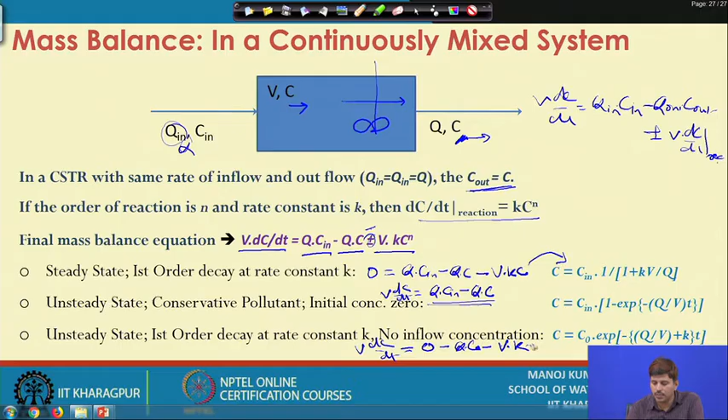If initial concentration is 0, or the incoming concentration is 0, we get a specific case: unsteady state, first order decay, rate constant K, no inflow concentration. So with unsteady state we have V dC by dt; with first order decay the reaction term is there; with no inflow concentration, C in or Q in is 0. So we get 0 minus Q into C out (or C) minus V K into C with first order decay. Based on these specific cases, we can derive these equations.

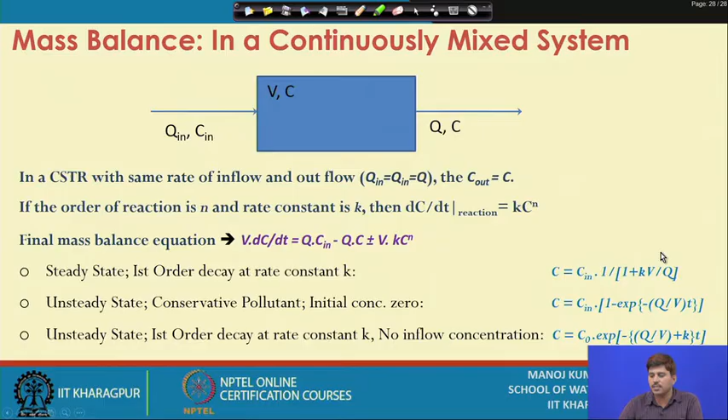In a plug flow system, the mass balance can again be worked out from basic principles. Let us say you have a plug flow reactor where flow comes in with concentration C in, and flow leaves with discharge remaining the same, but concentration C out. Remember there is no unique concentration here, because concentration in a plug flow system will be different at different places. As the plug progresses, the concentration changes - it is a function of space or time, not the same throughout.

So if we do a mass balance for this plug, let's say the thickness of the plug is dx, with the concentration at one boundary at position x, and at the other boundary at position x plus dx, so that thickness becomes dx.

So, concentration here is a function of space. This becomes Cx, and concentration here becomes Cx plus dx.

So, if we try to apply a mass balance for this plug only, we have V dC by dt, Q into Cx, Q is the flow and is the same everywhere across these boundaries. So Q into Cx, the concentration entering the plug, minus Q into Cx plus dx, the concentration leaving the plug, plus or minus V dC by dt due to reaction.

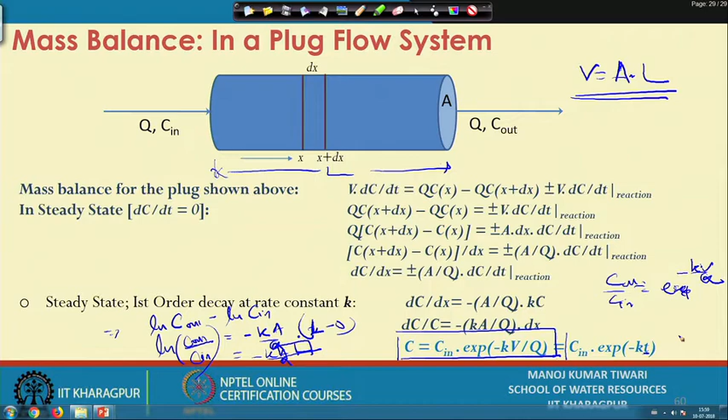So at time t, it is actually C in times e to the power minus k t, which is a standard typical first order decay. That way we can do it for a plug flow reactor, and then we can also apply this to a batch system.

In a batch system, the rate of inflow and outflow is 0. So substituting this into the classical equation, these terms turn out to be 0. We have V dC by dt equals plus or minus V dC by dt due to reaction, and dC by dt equals minus k times C to the power n. If it is first order, it becomes simple: dC by dt equals minus k into C, and C equals C naught times e to the power minus k t.

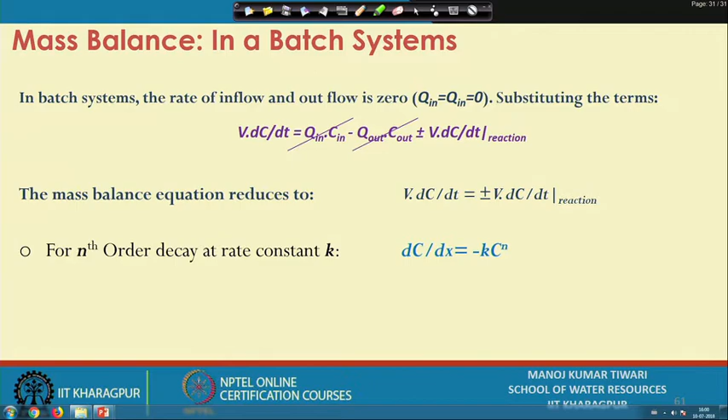So, that becomes the case for a batch reactor also. That way we can apply the concept of mass balance to some of these practical setups, whether it is a continuous flow system, batch flow system, or whether it is a completely mixed system or plug flow system.

So, let us take a look at what are the different applications for this mass balance in wastewater treatment. The wastewater treatment essentially targets the removal of mass of various contaminants present in it. That is the basic objective, to remove the mass of the contaminant so that water can be clean or purified, so that concentrations could be lower to the desired limit.

Now, it is important to understand how this contaminant mass is getting removed or reduced and where it is going, and this information we can only obtain through a detailed mass balance. For whatsoever specific contaminant we are considering, we must account for its entry route, exit route, and whatsoever is happening in between, and through its proper mass balance we can assess its fate and different transport processes in detail.

The concept of mass balance is also widely used for the design and optimization of various treatment units. So, if you are planning to design a simple reactor system for a biological treatment, depending on the reaction rate, how much contact time you would like to give, how much mass should we bring into that system, what should be the sizing - we can do the sizing or design of the reactor based on that.

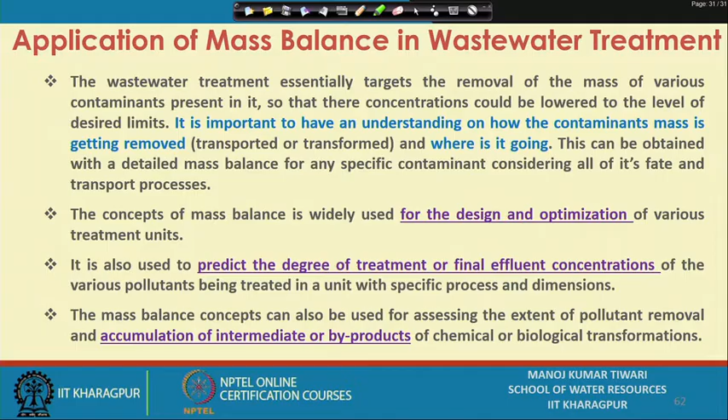These concepts can also be used for assessing to what extent pollutant removal is possible and whether there are intermediates or byproducts going to accumulate in the system, or chemical or biological transformations taking place. So how effectively and to what extent this can happen, whether it goes to complete mineralization, or if byproducts are formed, what is the mass of those byproducts, and whether they will be accumulating in the system or getting decomposed to further daughter products. All this kind of analysis is also possible with mass balance.

So, there are a variety of applications, and we will from time to time see this in future lectures when we go on to discuss the different specific units of wastewater treatment. However, to start with, let us see some quick simple practice problems on how this concept of mass balance is applied.

Many times we solve problems using the concept of mass balance, but we do not realize that what we are essentially doing is mass balance. For example, dilution - how much mass is coming into the system, how much mass is going out of the system, what happens after mixing - that is in fact also a problem of mass balance. So we will take a look at some of these simple problems quickly.

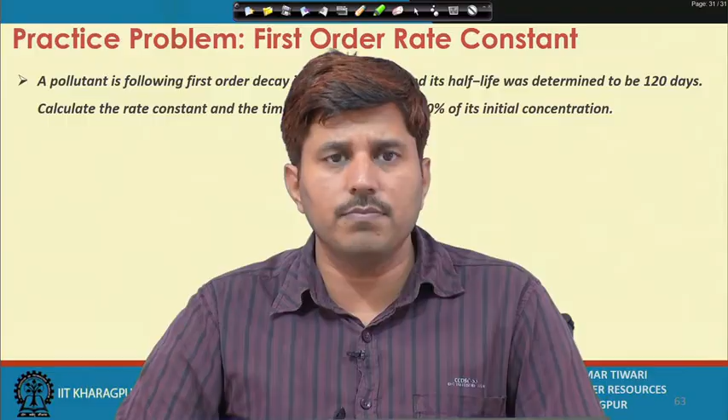So, the first problem is on the first order rate constant. A pollutant is following first order decay in a lake, and its half life is determined to be 120 days.

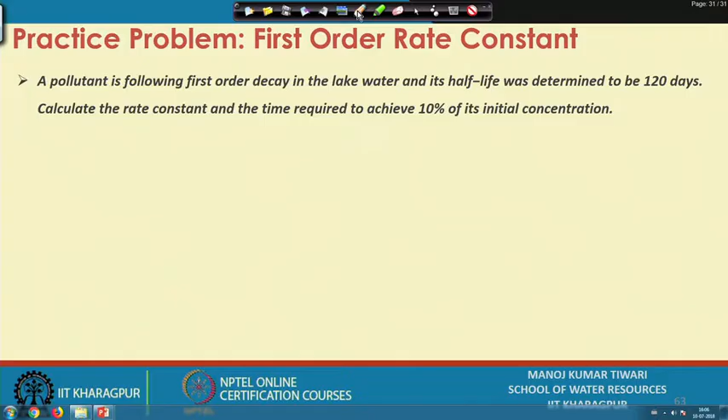We need to calculate the rate constant and the time required to achieve 10% of initial concentrations. It is a lake, so the pollutant is in a lake. We can consider that lake to be a well mixed system, and we can treat it as a batch problem because there is no information given whether there is any inflow or outflow from the lake. There is a first order decay of a contaminant taking place in the lake, and its half life is given as 120 days. We need to determine the time required to achieve 10% of its initial concentration.

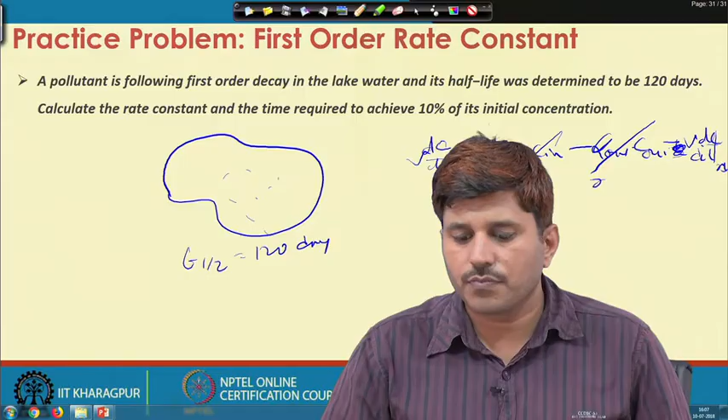If we apply the classical mass balance equation, dC/dt equals q_in times C_in minus q_out times C_out, plus the decay term, minus V dC/dt due to reaction. Since this is a batch process, the inflow and outflow terms become zero, and V gets cancelled. What we get is dC/dt equals minus dC/dt due to reaction, which is a first order reaction since it's a first order decay. So we have the simple equation dC/dt equals minus k times C, which can be solved as C equals C naught times e to the power minus kt.

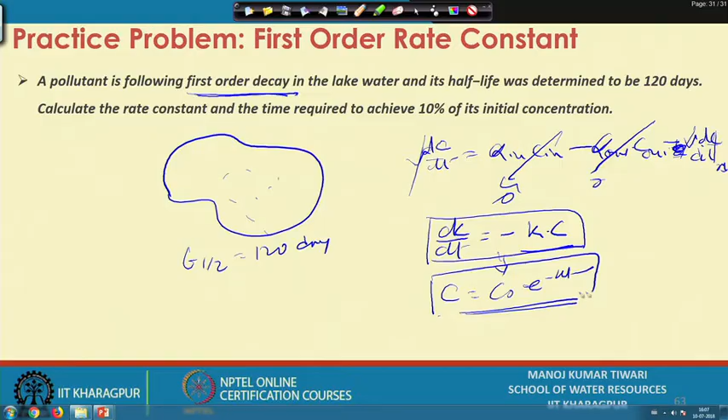This is our final governing equation, C equals C naught e to the power minus kt for this lake. Half life means the time in which the concentration has turned to half. So at t equals 120 days, C equals C naught by 2, or 0.5 C naught. Substituting, we get 0.5 C naught equals C naught times e to the power minus k times 120. C naught cancels, and taking the log, ln 0.5 equals minus k times 120, so k equals minus ln of 0.5 divided by 120.

Once we know k, we can use it to determine how much time it will take to achieve 10% of the initial concentration, meaning we need to find the time when C becomes 0.1 times C naught. Substituting into the same expression, 0.1 C naught equals C naught e to the power minus k times t, where t is unknown but k has been determined. C naught cancels, so the only unknown is k... wait, t. Taking ln again, ln 0.1 equals minus k times t, so t equals minus ln 0.1 divided by k.

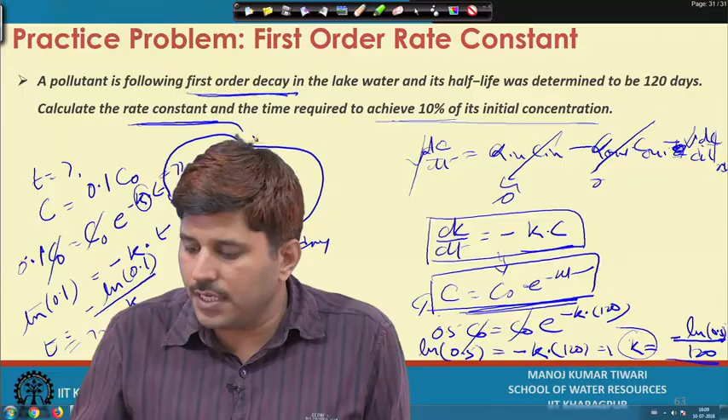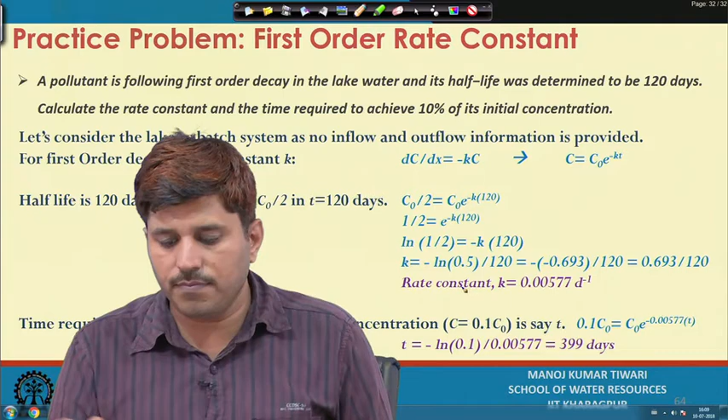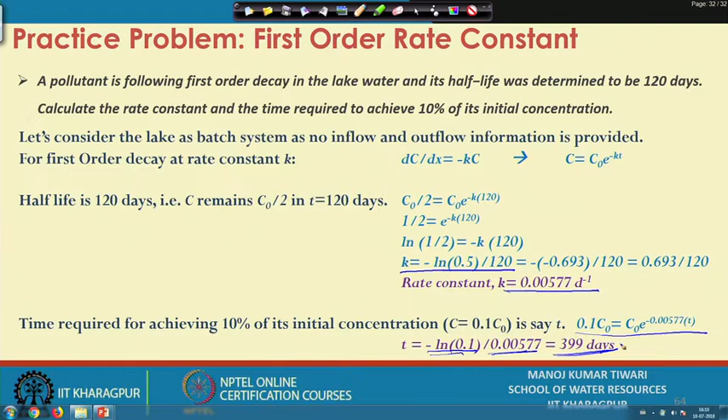So we can determine k from here, substitute it, and determine t. This gives us the rate constant and the time required to achieve 10% of concentration. That's the solution we discussed. We have k equals minus ln 0.5 divided by 120, which turns out to be 0.00577 per day, our rate constant. Then with 0.1 C naught equals C naught e to the power minus kt, we get t equals minus ln 0.1 divided by k, which gives us 399 days. So in 399 days we expect 90% removal, with only 10% remaining in the system given this rate constant.

Let us take another problem: decay in a steady state CSTR and PFR. We have a 400 cubic meter CSTR which receives water from a single inlet, with a flow of 40 cubic meters per hour, and the volume of the CSTR is 400 cubic meters. The inlet flow has a concentration of 20 milligrams per liter of TPAH, a contaminant. Now we need to determine the steady state TPAHs concentration in the exit stream.

So if it is in a steady state, obviously the flow will remain the same. So 40 meter cube per hour is the outflow also, and we need to determine what is the concentration in the single outlet. The k value is given to us. Further, it says what should be the volume of a corresponding PFR, this is a CSTR, if the same inflow, same reaction rate constant is used, what comparative volume of PFR we can use to get the same outlet concentration.

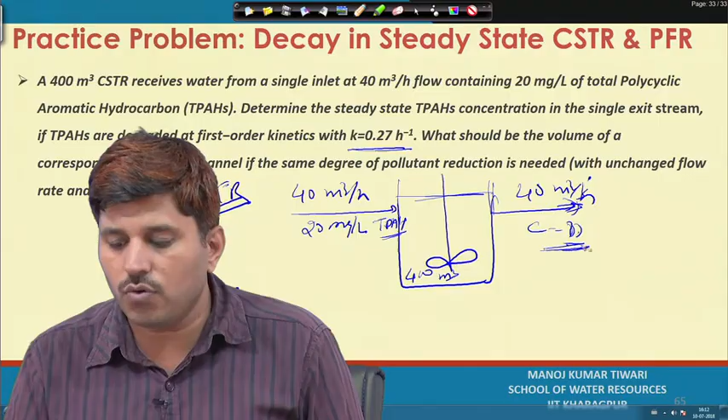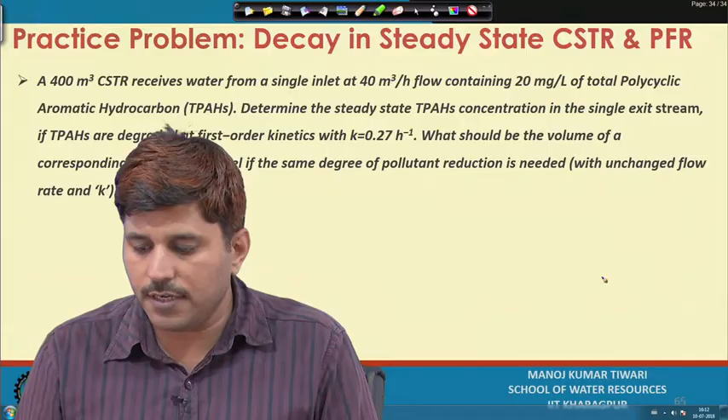So the first step is to determine the concentration in the outlet, which we will do by doing a mass balance in the CSTR. So if we do a mass balance in the CSTR, our generic mass balance equation is this.

Now this problem says it is a steady state, so there is a steady state assumption, meaning this term becomes 0. It is a CSTR, so C out is equal to C, and it is a first order decay, so this becomes Kc. So our equation reduces to 0 equals Q in into C in minus Q into C minus KCV. From here we rewrite it as Q plus KV into C equals Q into C in, and eventually we get C equals C in times 1 divided by 1 plus KV by Q.

So this final concentration from the CSTR will be like this. Our initial C in is 20 milligram per liter into 1 divided by 1 plus K value 0.27 per hour, V is 400 meter cube and Q is 40 meter cube per hour. So this becomes 10, 2.7 plus 1 is 3.7. So 1 by 3.7, that means 5.4 milligram per liter is the final concentration coming out of the CSTR.

Now what happens if we want this same concentration, 5.4 milligram per liter, to come out of a PFR, what corresponding volume of PFR should be used. So for a plug flow system, again this is our generic mass balance equation.

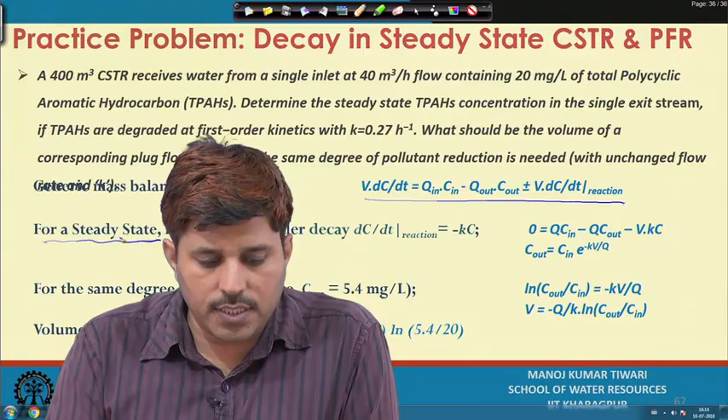Plug flow system is also in a steady state, so this term becomes 0, and it is a first order decay, so this term again becomes K into C. So this equation reduces to Q into C in minus Q into C out minus V into K into C, and as we discussed for plug flow in a steady state earlier, we get the final expression as C out equals C in times e to the power minus kV by Q, or V by Q we can write as T also, so that becomes C in times e to the power minus k into T.

So for the same degree of treatment, our C out has to be kept at 5.4 milligram, what we obtained for CSTR. So for that we need to use this final expression. We can take C out by C in and take ln, so we get minus kV by Q, and from here V equals minus Q by K into ln of C out by C in.

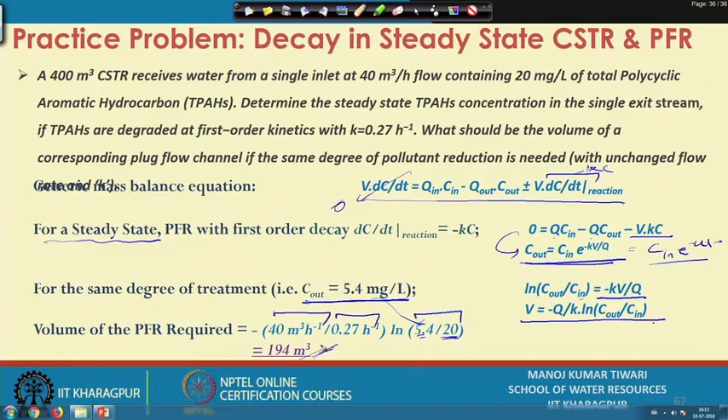So our Q is this much, K is this much, Q by K into ln C out by C in, with C out kept the same and C in was 20. So this becomes 194 meter cube. So what we can see here is that for the same degree of removal, a CSTR required 400 meter cube of volume, however plug flow can achieve that with a much smaller size, almost half of that, less than little half. So 194 meter cube, plug flow systems that way are more effective from a reaction perspective.

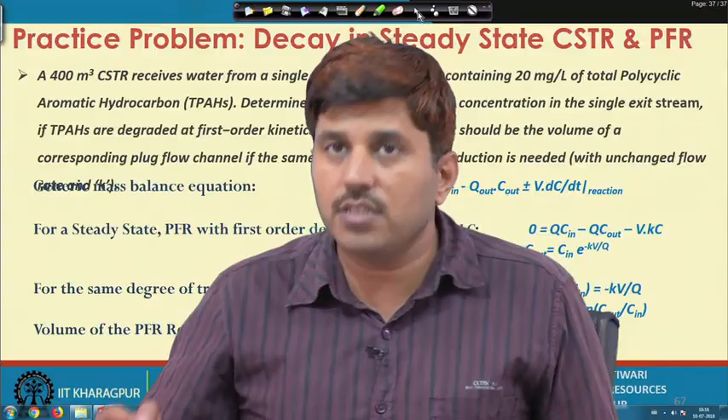However, there are limitations of mixing and temperature control and other things, so both CSTR and PFRs are actually used in practice or in the field. So this is how we can study the decay in CSTR and PFR.

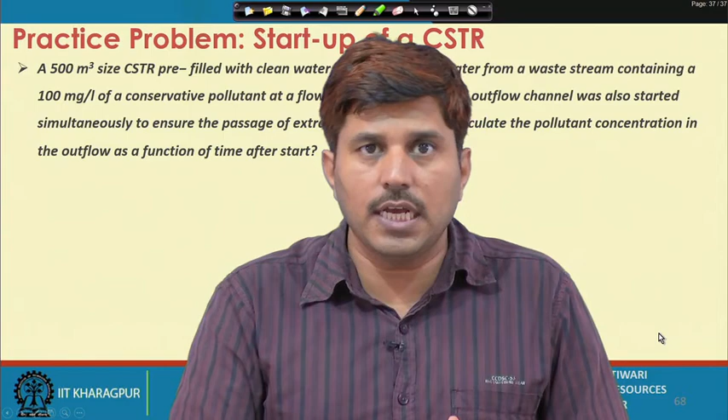We will take just one more problem, the last problem, which is on the startup of a CSTR. Startup, as in when we are talking about this, actually becomes an unsteady state problem. So we have a 500 meter cube CSTR pre-filled with clean water, which started receiving water from a waste stream containing 100 milligram per liter of a conservative pollutant.

So we are having a CSTR of 500 meter cube size. Volume is given to us, and this is pre-filled with clean water, and it has started receiving waste containing 100 milligram per liter of a conservative pollutant at a flow rate of 50 meter cube per day. An outflow channel was also started simultaneously, because since it is pre-filled with water, once the water starts coming in, the same amount of water will start leaving also. So the flow rate remains the same, Q out remains same, 50 meter cube per day.

Calculate the pollutant concentration in the outflow as a function of time after start. Remember, this is a conservative pollutant, so there is no reaction term here. So dC by dt due to reaction is actually 0, being a conservative pollutant.

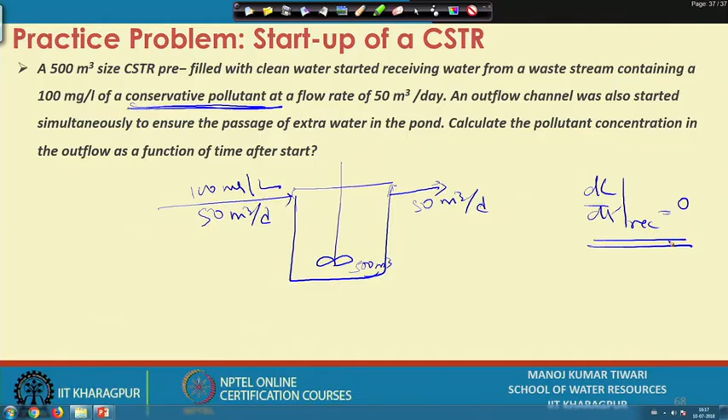So in your classical mass balance equation, again we can apply the basic principle of the classical mass balance equation and see how we can simplify that to derive whatever information we need. So our generic mass balance equation is this.

Now for a CSTR we know that C out is actually equal to C and there is no reaction, so this term becomes 0. It is an unsteady problem because we need to calculate the pollutant concentration as a function of time after start, just at startup. So this is actually an unsteady state problem.

So what happens is V dC by dt is equal to Q into C in minus Q into C, which is the out concentration. There is no reaction happening. Initially it is in the unsteady state, because by the time it reaches steady state, being a conservative pollutant, whatsoever is the concentration in inflow will be the concentration in outflow and reactor, because there is nothing taking away that concentration.

So we can rearrange this equation. We can take Q as common, so this becomes Q(C in minus C), and we can bring C in minus C here. So dC by (C in minus C) is equal to Q by V dt.

We can integrate that now. So this becomes ln(C minus C in), of course a minus sign can be taken here, so minus Q by V into T, plus an integration constant.

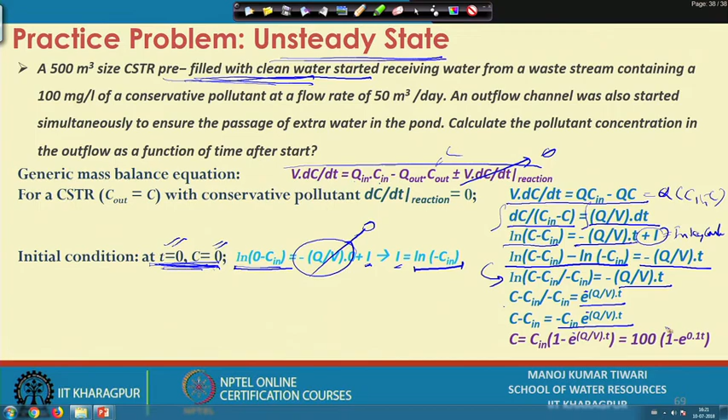So this way we can have this expression, and eventually what we get is this, where 100 is C in, since C in was 100. So we substitute C in and Q by V. Q was 50 and V was 500, so 50 by 500 is equal to 0.1. So this becomes 0.1T, and this becomes the concentration in outflow as a function of time after it starts.

So concentration in outflow will be like this, which is a function of time, C as a function of time. That way we can derive the solution for the unsteady case.

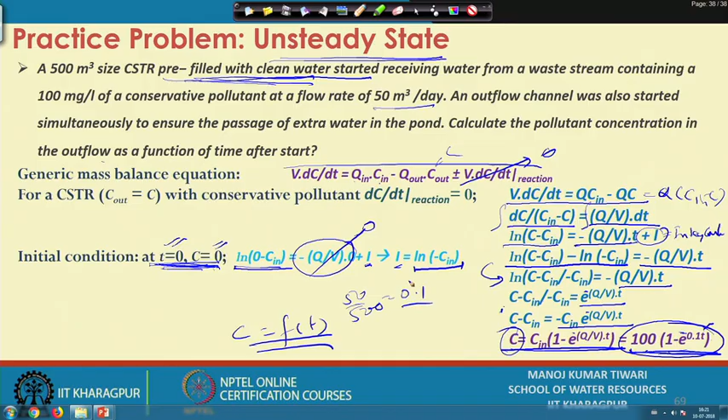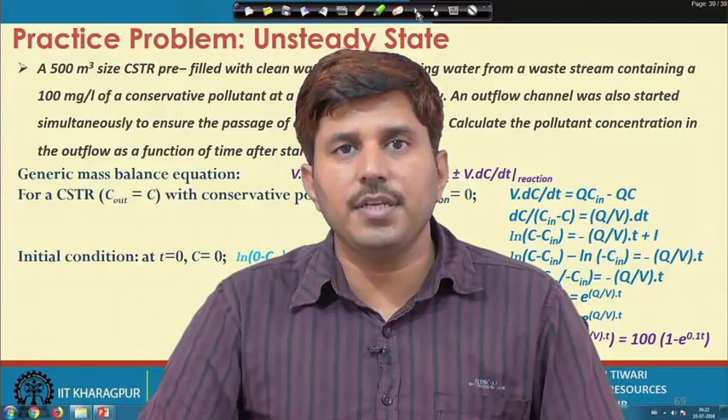So these are some of the problems which can be solved using the concept of mass balance. There are many more, but the basic concept remains the same. We will be happy to discuss a few more problems in the forum if any of you are attempting them or have any queries. So with this we conclude the discussions for this week.